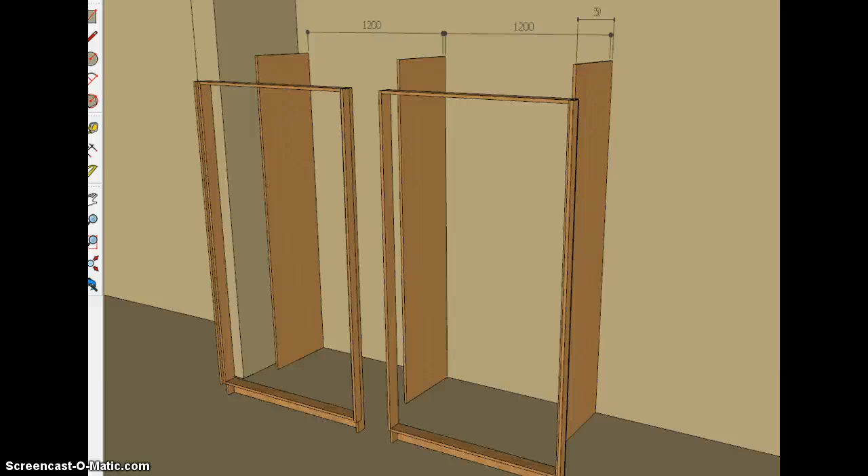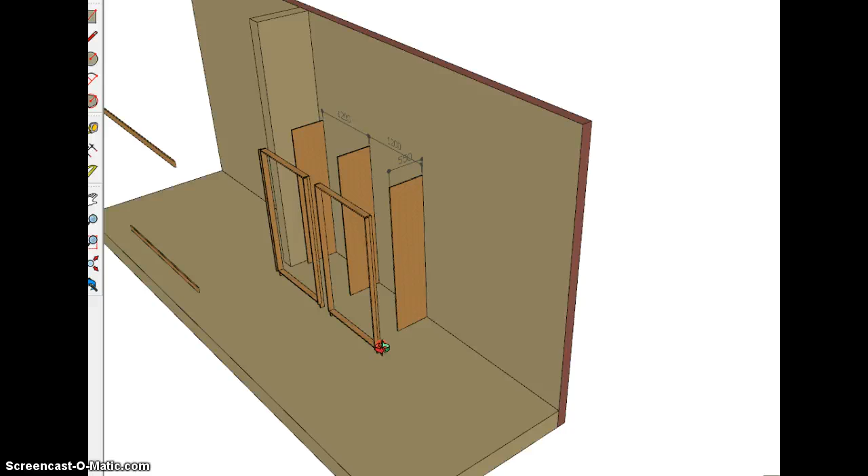The main idea here is to split the 610 panel by cutting off a 60mm strip on the front, and then these panels here end up with 550. The advantage of cutting the 60mm off is you don't have to cut notches out of the bottom of these panels when they're 610. All you have to do is make the 60mm strip with the 95mm gap already at the bottom, so it's just 95mm shorter.

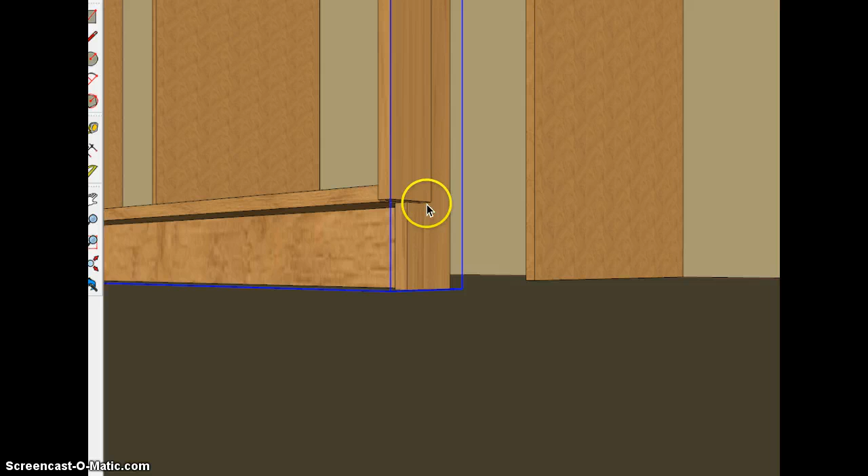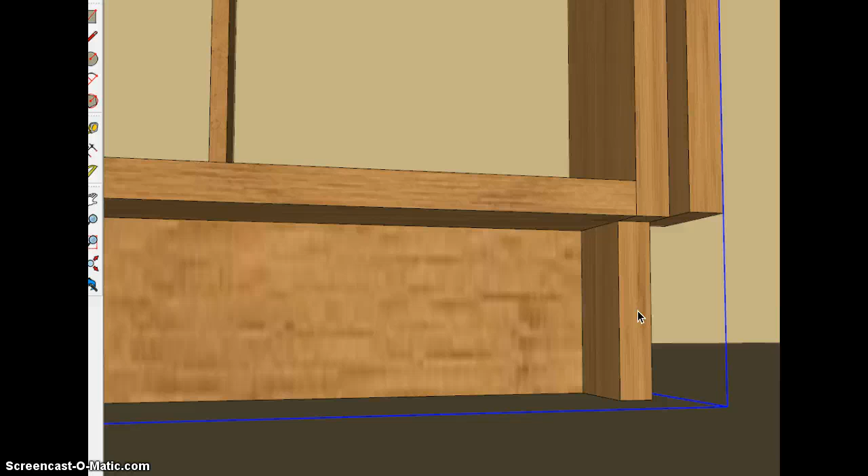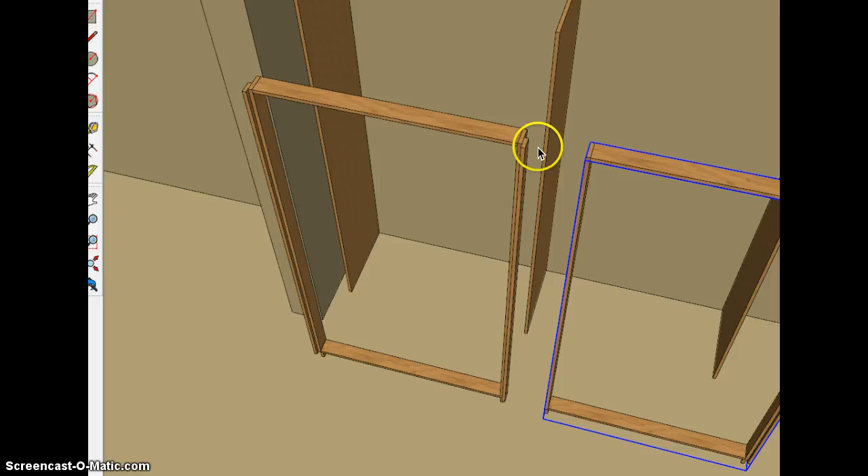And the other thing we've done there, on the lining, was to take a notch out here on that lining, so that sets back 22mm, say, so your 18mm plinth will set back 4mm, and then it's all screwed together like normal, so it all comes pre-made up together. So these 60mm strips can be fixed to the frame prior to going out of the factory, and you can fit them on each side or where required.

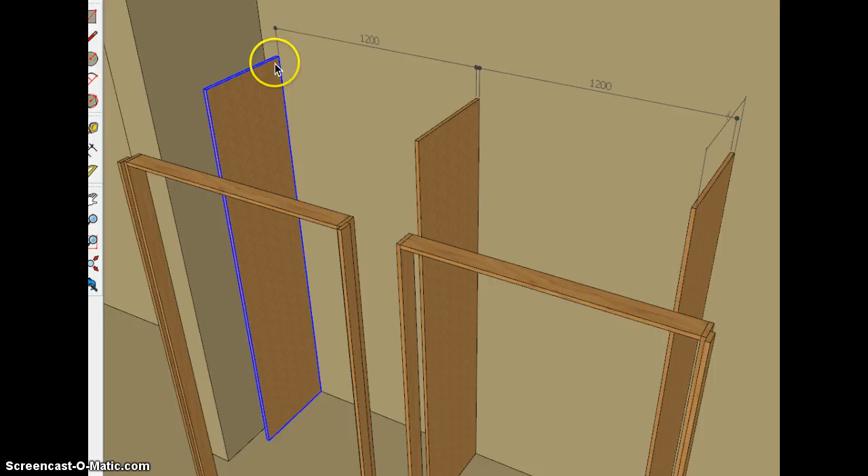So the fitter comes on site, he quickly checks these walls, and then he sets up his first panel and he scribes it back to the wall and makes it near enough vertical at the front. It doesn't have to be exact, so he just cuts his panel in, spaces out the width of the frame, which in this case is 1200, fixes the next one, and so forth out to the end. So now we've got 3 panels scribed to the wall.

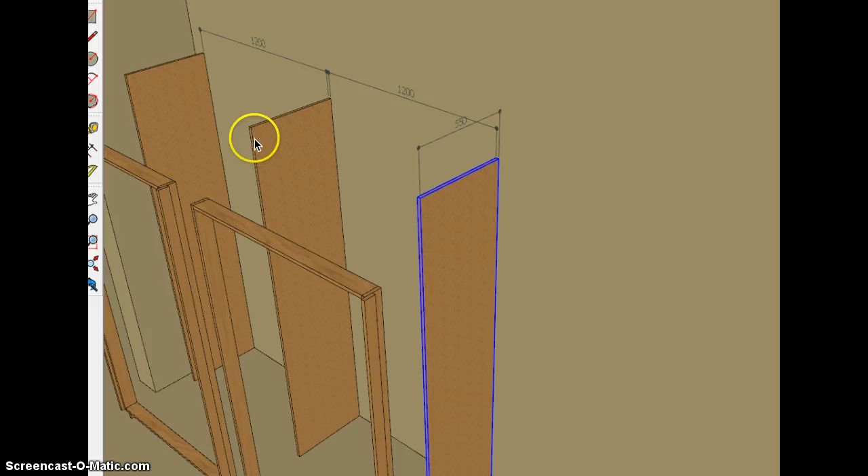So say the wall is curving here, this panel would end up being, say, 530, that one's 540, and then goes back into 530. So this one here is sticking out 10mm, and it doesn't matter that they don't line up, because we're going to take out that difference with these adjustable frames.

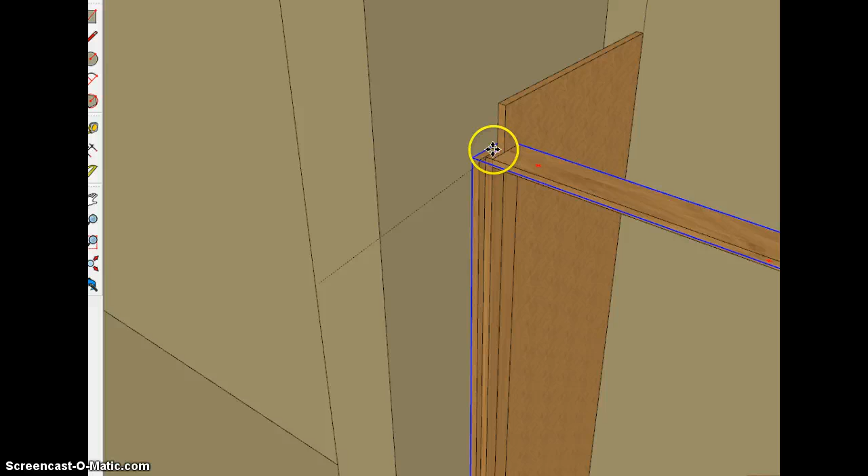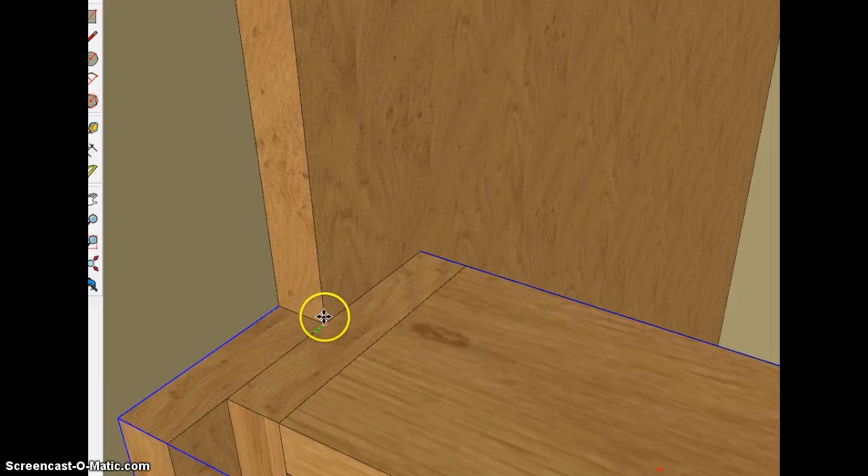Actually, I'm going to take it up from the bottom here. So we get our frame and we plug it into place. Boom. Let's bring it forward a bit. I think it's about there. So that's in place, and then we do the same to the second frame. Just pick it up there, stick it there roughly, line it up, and that's our second frame fitted.

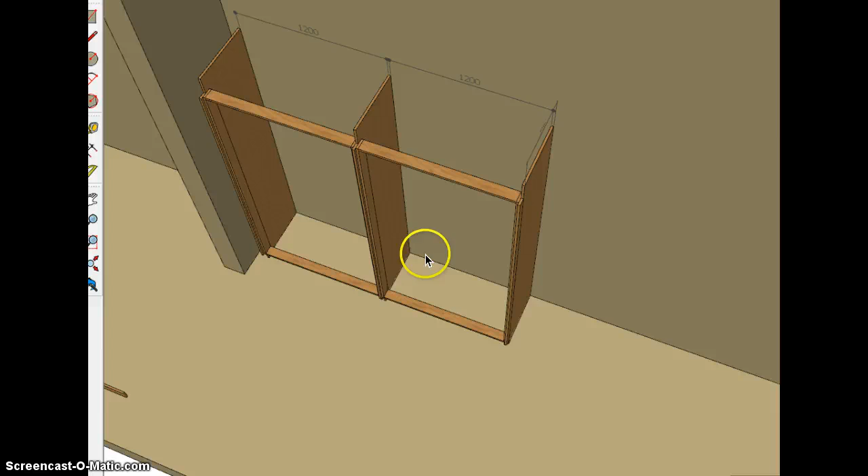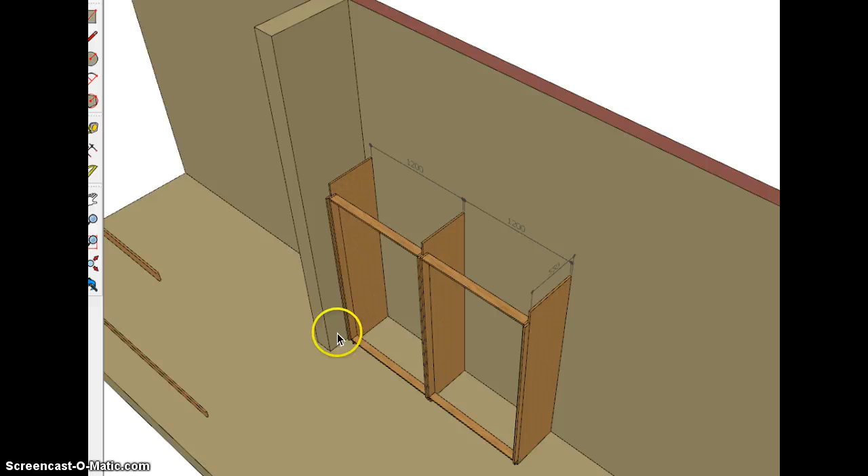So what you do then is you find the point from the wall that comes out the furthest. Say this panel ends up sticking out 550, and these are set back a bit. Well, that's the furthest one out, so you would plumb this one first, these 2 center rails, and then put on a straight edge or a string line or whatever, and then just adjust these frames out accordingly.

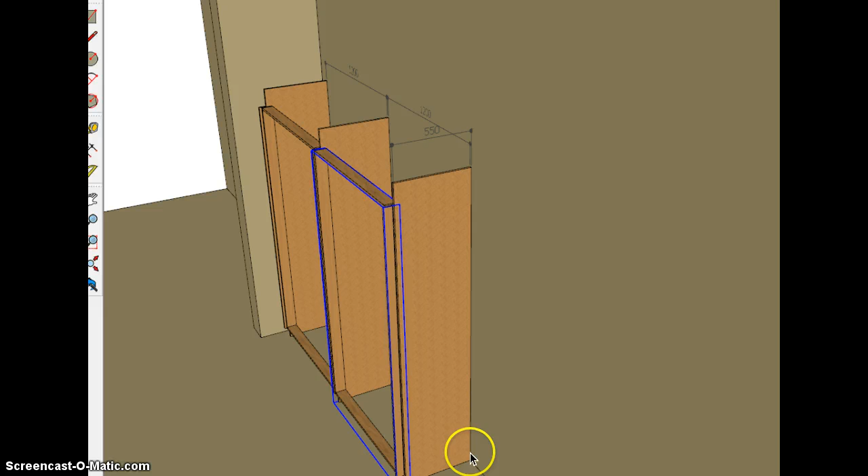And that ends up having a gap there where this panel was cut 10mm back into the wall, so that 10mm is showing there. So everything on the front of these frames lines up perfectly the whole way through, and it doesn't matter if the wall's out an inch at the top down to nothing at the bottom, it can be taken out and recovered by this adjustable frame.

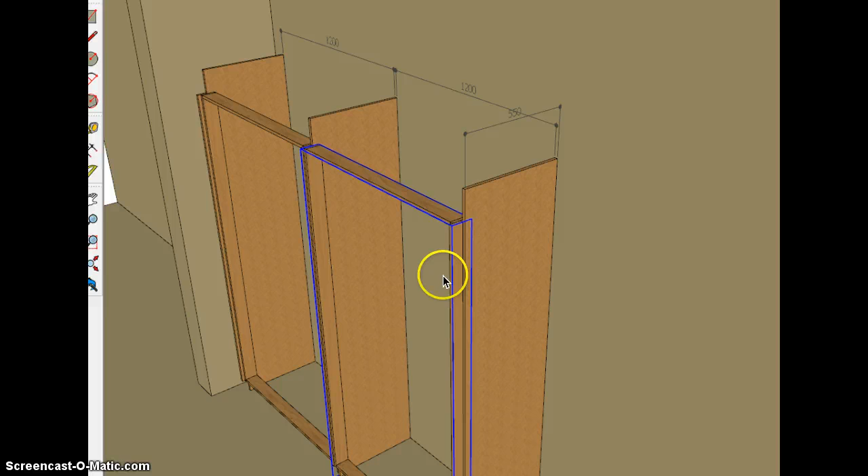So there are three big advantages here. You save material costs, because you've got 3 narrower panels and you can use up lots of little strips. You can have the adjustment. There's no need to notch out the panels either, along with the frames. You just have to cut them 95mm shorter, and then you can edge the bottom edge of these as well. So that's that advantage.

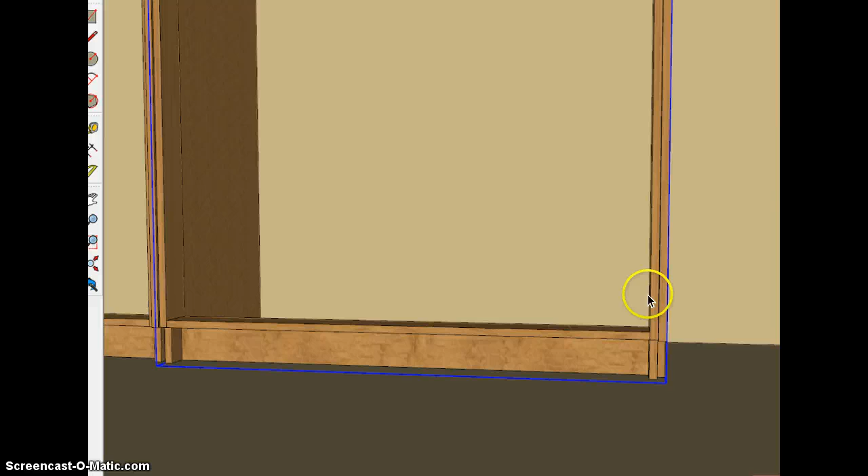And the other advantage is, by doing it this way, you can run your plinths right through the bottom and right through your cornice or scribe panel. So let's stick that in there and let's have a look at it.

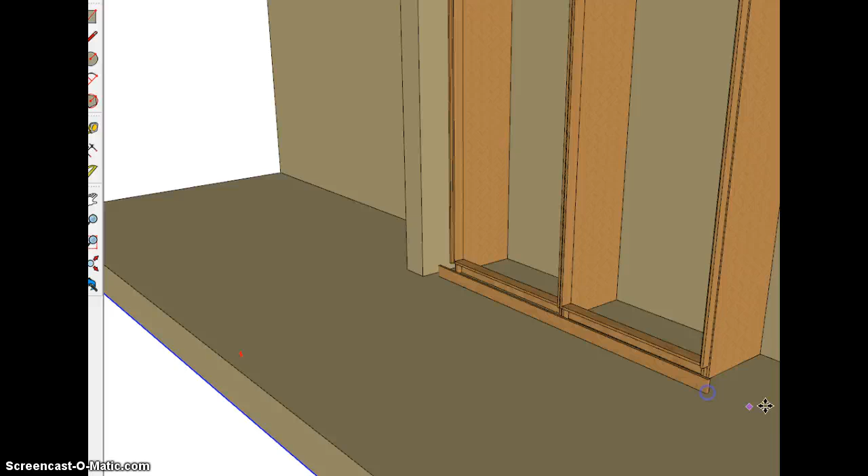So there's our, let's just stick it there, it's a bit closer. And get back to there. There's it, that's your finished look.

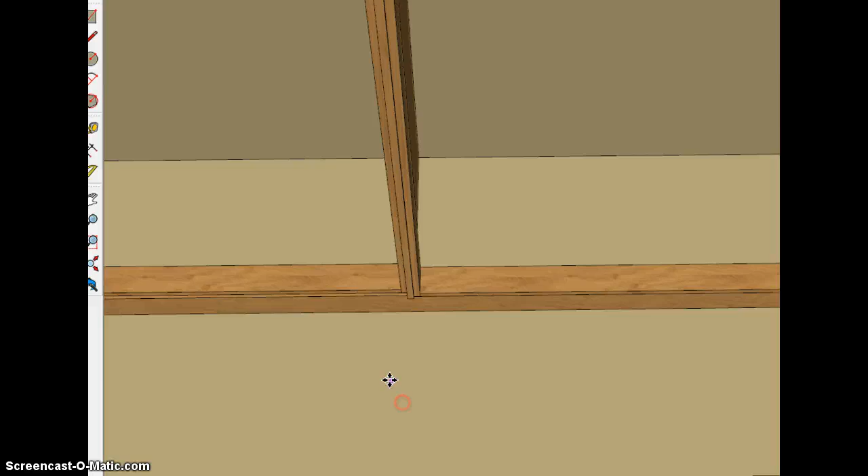I've moved that frame forward, I'm just going to move it back just for a visual here. Now, let's move that bottom rail back a wee bit. Or is it my angle. So I need to move that back a wee bit more.

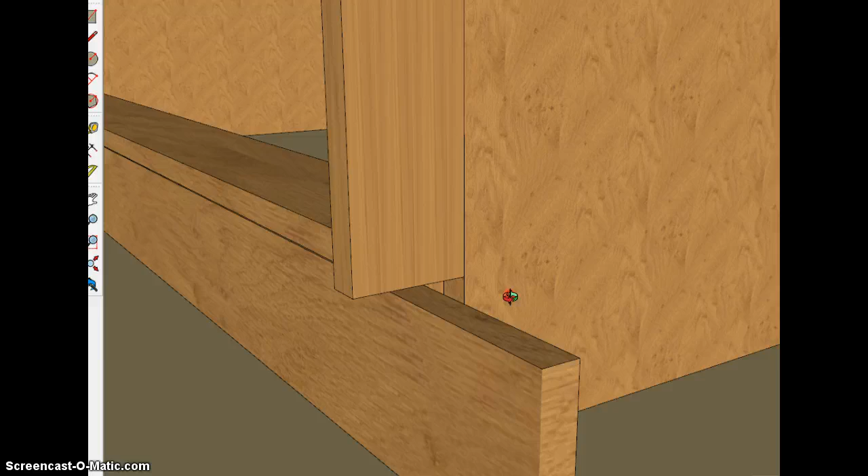So it sits back underneath, that's nearly flush. There we go. So you see, nice. You got a nice look right through up to the wall, and you just cut it.

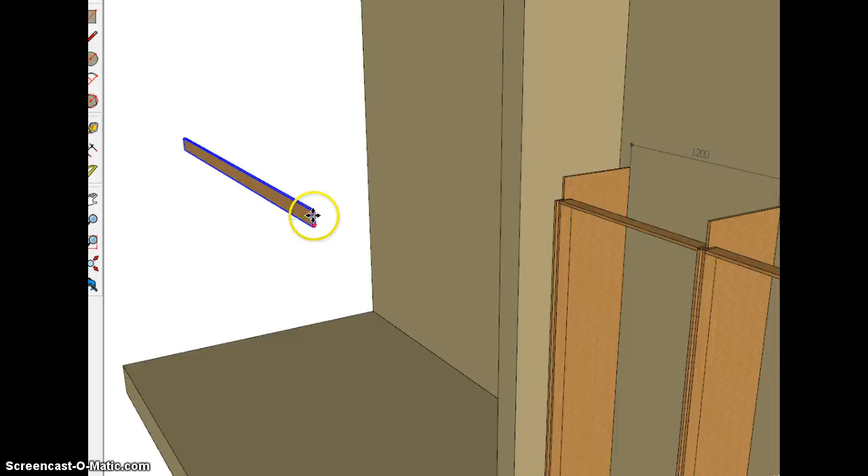Same with the pelmet. Stick on the pelmet and see if any problems arise. So I'm just going to stick it on here for now, and bring it out to the front here. And there you have your pelmet running right through.

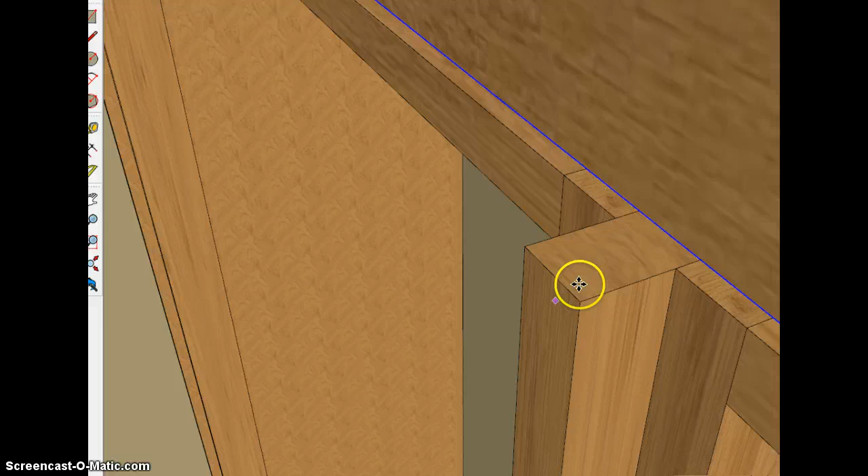Bring it out to the front. I guess we just put it there, something like that. So you got a nice look running right through the top. Oh, it's just sitting up off there, but that's another room. So it runs right on over to the wall.

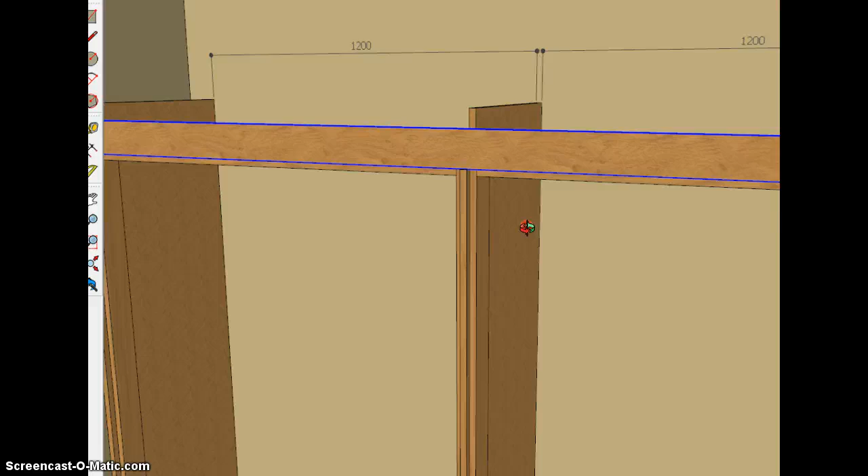The reason why these panels are 50mm, look a bit taller here, is that they get - that's the piece that we add on for scribing, so it'll be cut off on site. I've just kept it on there for the Excel sheet to send about 50mm longer than the overall height of the room.

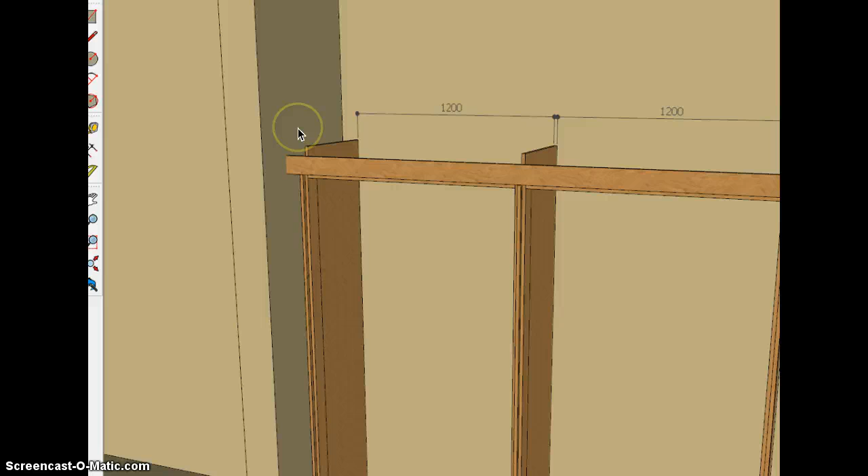So there we have that so far. Let's switch on the doors and just have a little look at it. Switch on the doors. There we go. So now we have this scenario.

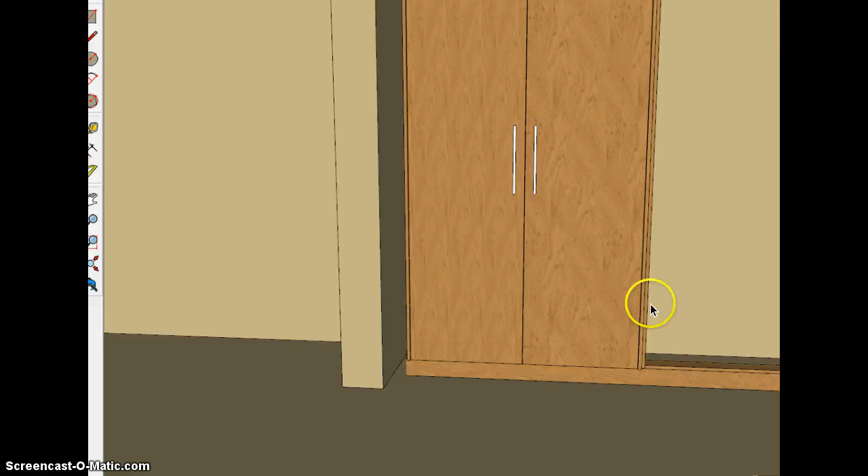Which looks all nice, clean finish, easy to fit, full adjustability, and then the only thing we have to resolve then is the scribe filler over this end, and that can be done a couple of ways. You can just set a panel in like so.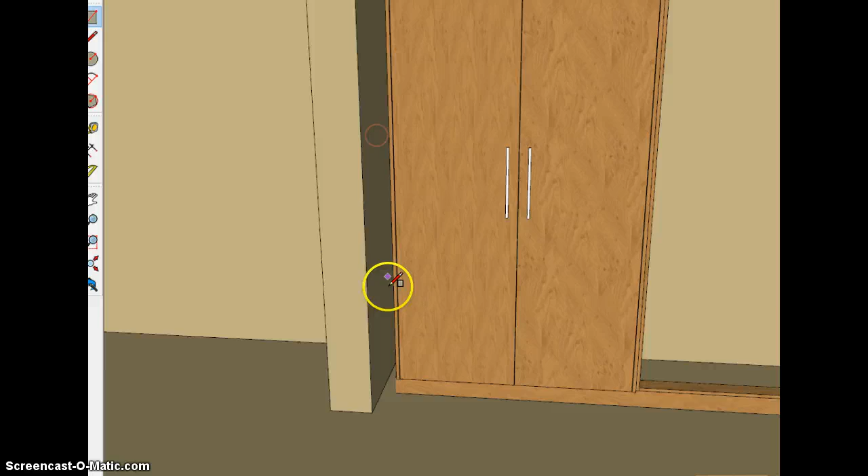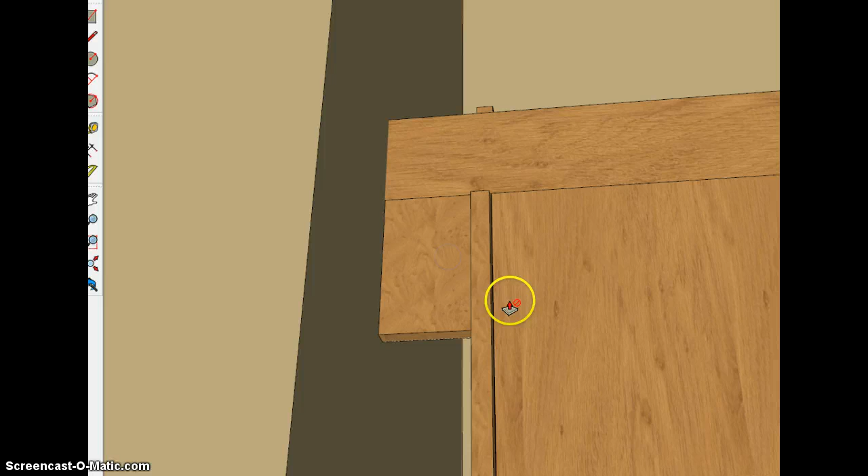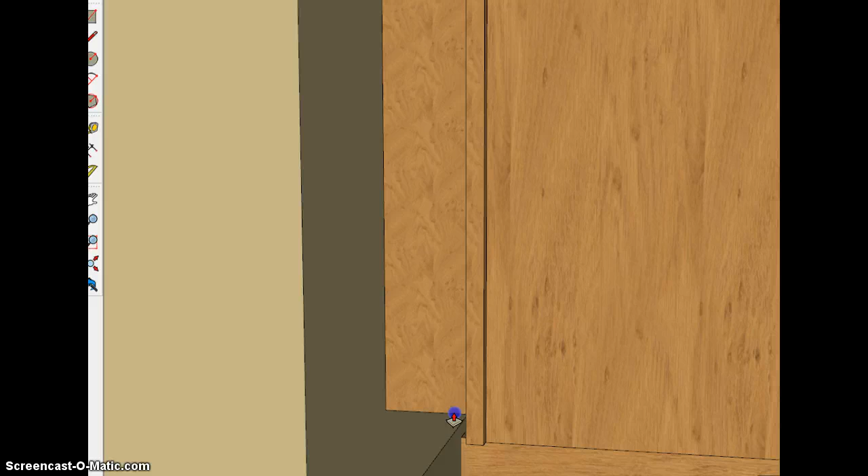If I click that, like so. Just a bit of colour. The panel can go from there to there, and that can go to the floor, like so.

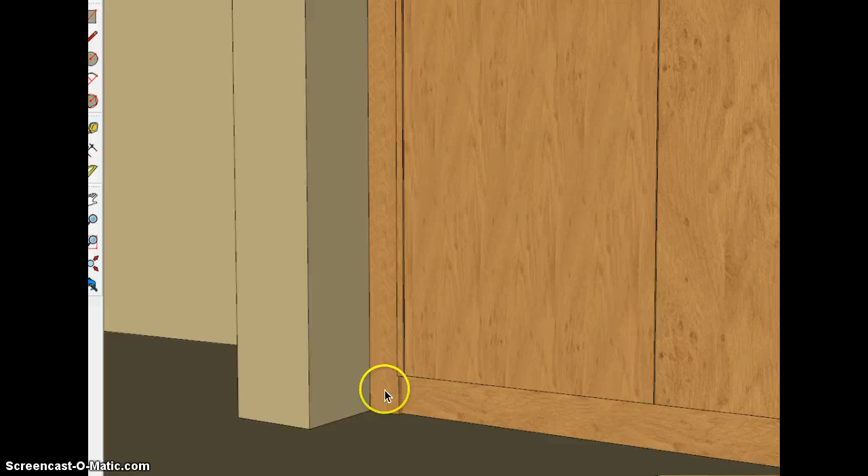And then you get that sort of look like that. You get a little check on there because we set it back further than 18, so that'll look okay. Or you can make it flush there if you wanted to.

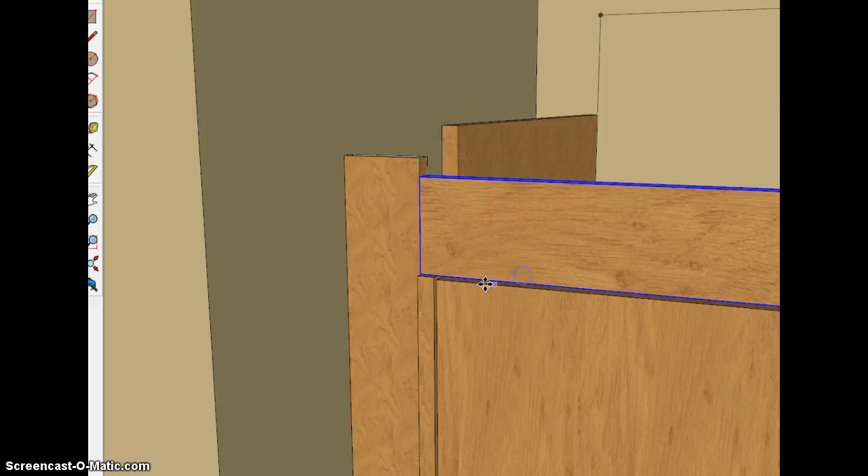Again, you could stop this back that way and run that on up like that, and finish that flush with that. That's one way of doing it.

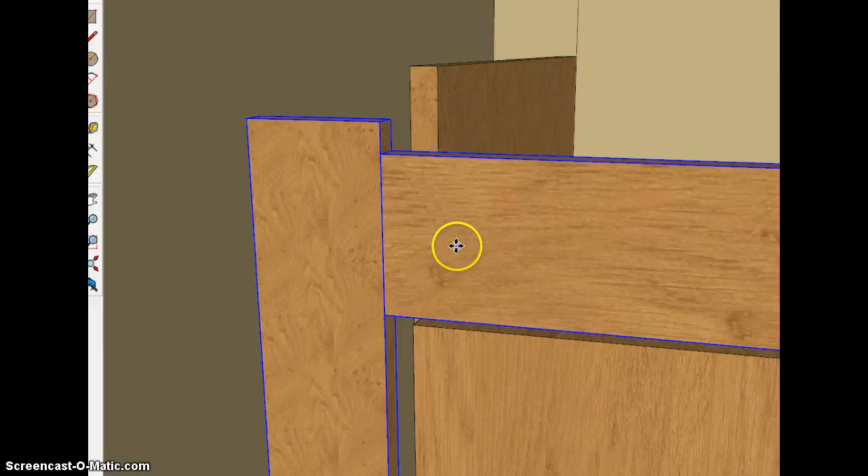The other way of doing it is to take this little 60mm strip off this side. I'm just going to delete that, and then move these here 18mm that way, and that will be the other way of finishing it.

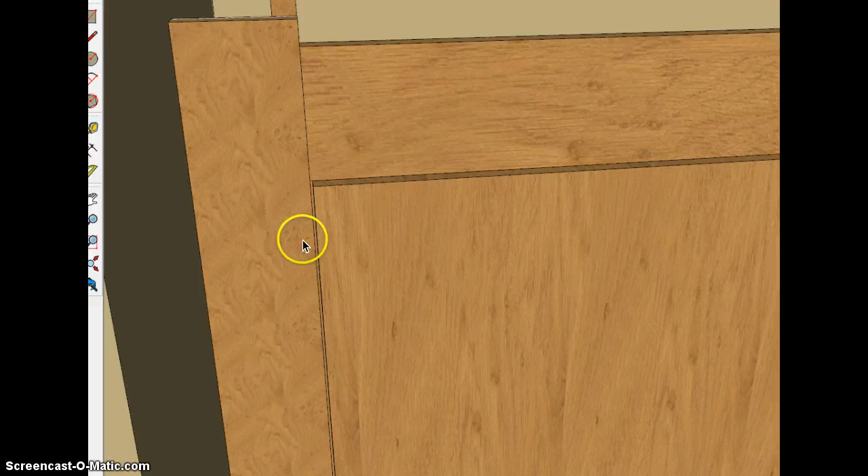So you've got less of a scribe on the ends, but either way I don't think it matters, that can be left up to the fitter. We don't have to make a decision on that. They could just say you could fit it whatever way you like. If you need to gain the extra, you go on site to fit and then you find out you're a bit tight, you could leave the filler off, the 60mm, and if you've got plenty of room, then you can put it on. So just leave it open to whatever way the fitter wants to do it. Just give them both options.

That's it, that's the video. Tell me what you think and what ways to go forward.